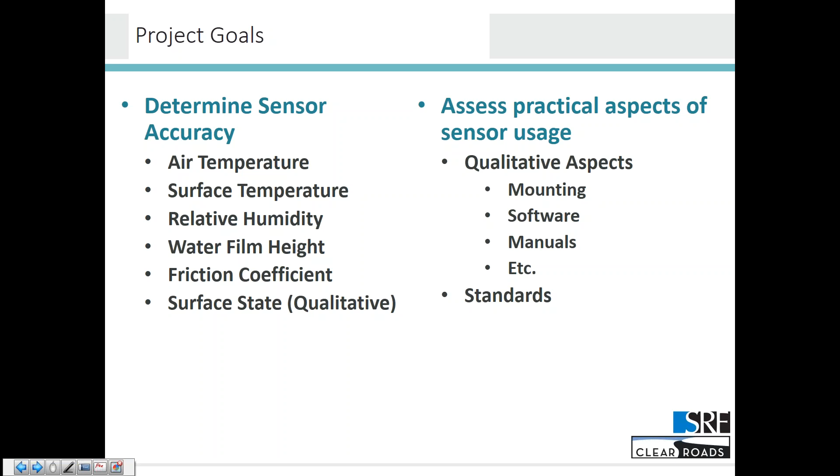The first thing that we did was try and take a look at some of the research literature out there that people have conducted over the years to talk about mobile condition sensing. The first thing we really notice is that the evaluations and research on this is fairly limited. There are only a few sensors that have been evaluated. Generally, these evaluations are lab studies, and they're not real world. You're not taking them into traffic driving on the roadway, and as a result, you see individual evaluations of how well something reports a pavement temperature, an air temperature, et cetera.

When we did find field studies, generally they were talking about friction and the relationship to braking distances and things like that. So they would take out one of these big, like Halliday friction wheel things, pull it around, and then compare that to a sensor.

But they weren't really doing overall evaluations for the quality of the data that the sensor provided. In the few side-by-side comparisons, a lot of the times they were just looking at one. It wasn't a true side-by-side, and that really made it very difficult to compare between studies. You would have a sensor being exposed to a set of conditions at a point in time, but you wouldn't have multiple sensors in the same condition at the same time. And that makes that comparison really, really difficult.

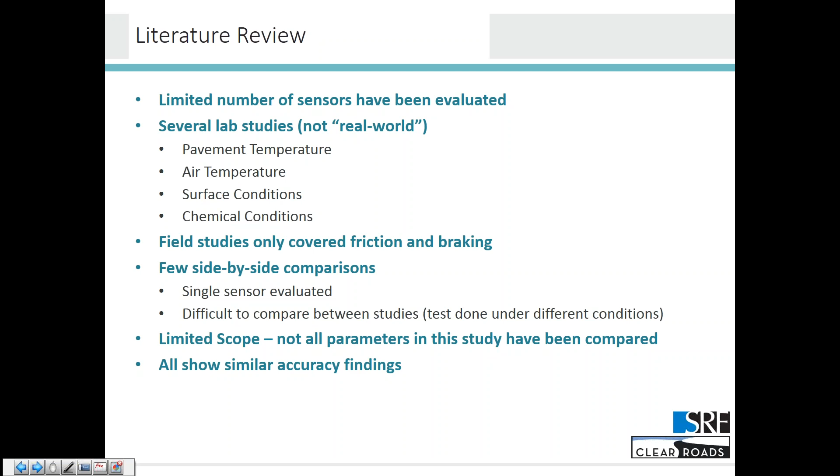And that gave us the background of what we were looking at and what we were going to have to try to accomplish. And we very quickly came to the realization that what we were doing was somewhat new. The format and scope of this project was something that hadn't really been done before. So the next thing we did was take a look at that literature review and go out to do a survey of the Clear Roads states.

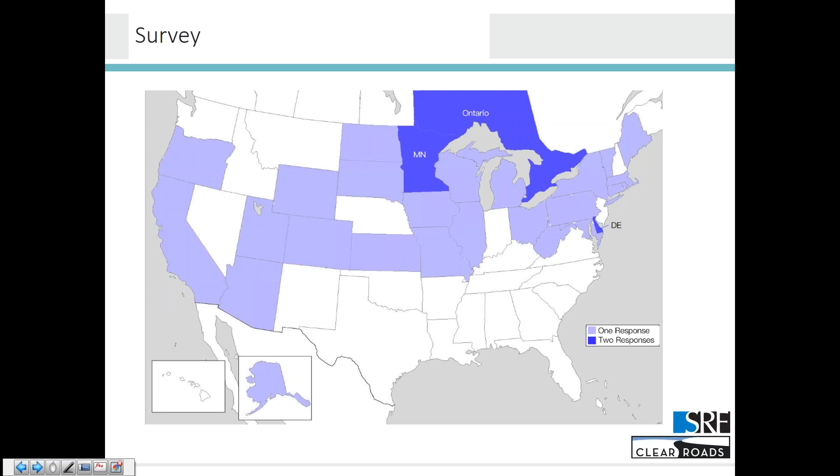Here you can see the folks that responded to the survey. Generally, there was one response per agency in the state, although from a few folks we did get two from different agencies, in particular Ontario, Canada, and Minnesota, because those folks deal with a lot of snow and were more than willing to share what they learned with us. The big results of the survey looked something like this. These were the big takeaways that we found.

First of all, there isn't a lot of mobile sensor use out there. We found 18 states that did them in one form or another, at least one vehicle equipped with at least one sensor type. But we found 19 states were planning to add these sensors. So although it isn't prevalent, it's definitely growing. And 9 of those states plan to add more than 80 sensors to their fleets in the next 3 years.

So clearly there is a trend out there to want to start collecting data in a mobile environment, and that puts studies like this in the forefront of importance because these are becoming more prevalent. You should know a little bit about how they perform. One of the things I mentioned early on as a goal is to start figuring out how people use these in a practical environment. Aside from how do they perform, what do you actually do with them?

And it was interesting. We asked folks, how do you actually attach these to a vehicle? Side mirror was really common, and I'm sure a lot of the folks listening in have seen the little, I think it's RoadWatch sensors and things like that, that sort of clamp onto the mirror of a vehicle and give you a pavement and air temperature. But interestingly enough, there were a fair number that used a trailer hitch where it either clamped onto the ball or fit into a trailer hitch receiver.

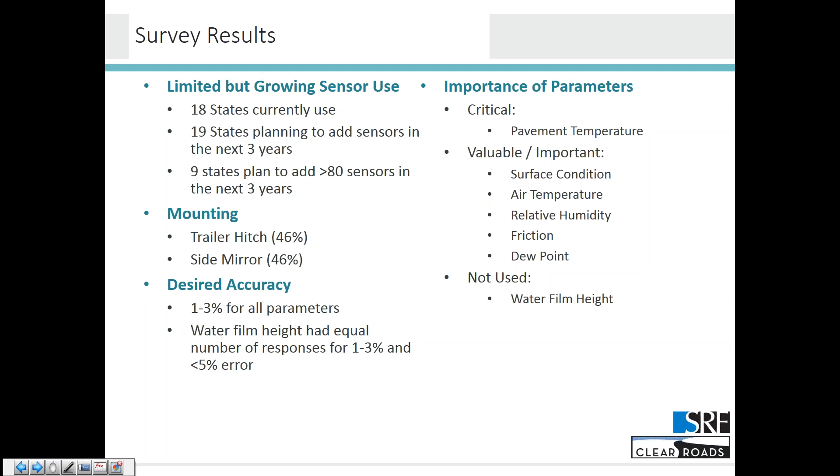So let's talk about the actual sensors. These neat little silhouettes on here are all to scale, so they give you a feel for the relative size of the devices out there. There were 4 sensors that we were able to obtain to evaluate: the Lufft MARWIS unit, the Teconer RCM 411, Vaisala's DSP 310, and the High Sierra IceSight.

All of these, except for the Teconer, have a kind of a dedicated mount. They attach to the vehicle one way or another. The Teconer was unique in that it actually provided an adapter to clamp onto the ball on a trailer hitch. So all of them are roughly the same size. All of them, as you can see for the reported parameters, are roughly the same. But how they mount varies quite a bit depending upon which one you're talking about.

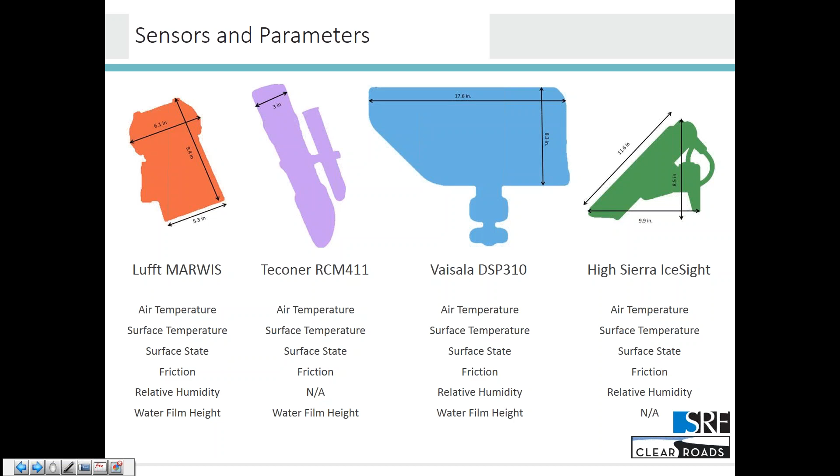In terms of the parameters they report, they were all the same, except the Teconer did not report a relative humidity, and the High Sierra IceSight did not report a water film height. So that's what we looked at. A quick note, the Vaisala was actually a 2-piece unit. There's a separate device that pointed down at the pavement, which is slightly smaller than what you see here. We did have both pieces mounted on the trailer, but these are far and away the largest chunks. And you can see that here.

The test rig is a beautiful example of our handiwork here at SRF. It looks a little bit more kind of rustic than it actually is. As you can see, there's a basic frame which we constructed and cross-braced to make sure that the sensors themselves were stable and didn't vibrate on the trailer itself. We have a large watertight enclosure for the electronics, that big equipment box you see there.

At the very front and back, you can see the 2 Vaisala units. There's one at the extreme rear pointing down and a separate unit up at the front also pointing down. And then the Lufft, Teconer and High Sierra devices in between. We did create these adjustable mounting height devices, and we just called them sleds, but they're really just a 2x4 with some holes in it. But that allowed us to install the sensors at the manufacturer's recommended height all the way around. That's what we maintained for the test. In all cases, we installed at the recommended height, and we used the default calibration for that installation.

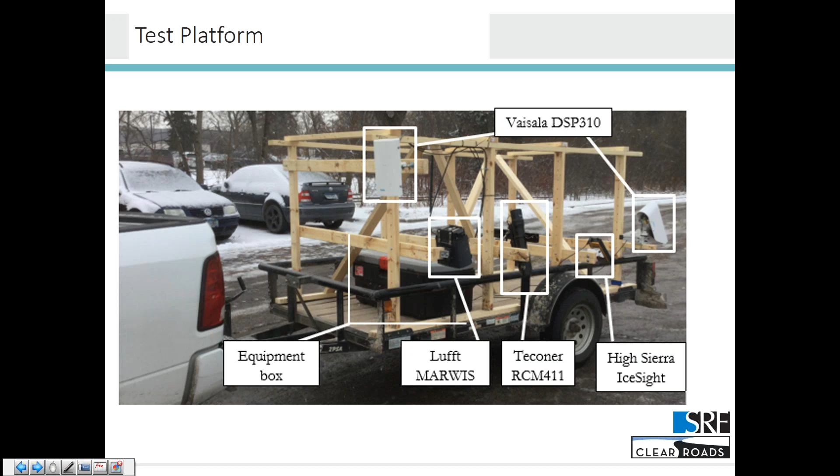And that really gets us into what the user sees. All of the sensors provided software for a user interface. You can see that the Lufft, Teconer, and Vaisala are all bits of software that ran on Android cell phones. In all cases, for those, they connected wirelessly to the device, either through a built-in Wi-Fi hotspot in the device or through a serial over Bluetooth connection. All of these bits of software on the cell phone send data up to a cloud service from which data can be retrieved later.

The outlier here is the High Sierra device. It connected wirelessly as well, but to a laptop computer, and then they provided a Java application that allowed you to see in real time what it was doing. There's also a separate little window that popped up that's not shown here that gives you just a readout of temperature and surface data as well. But this is what you use to kind of see the incoming data and perform calibration, things like that. The High Sierra also provided a physical connection if you chose to use it. I think it was just an RS-232 serial that you could use to connect out.

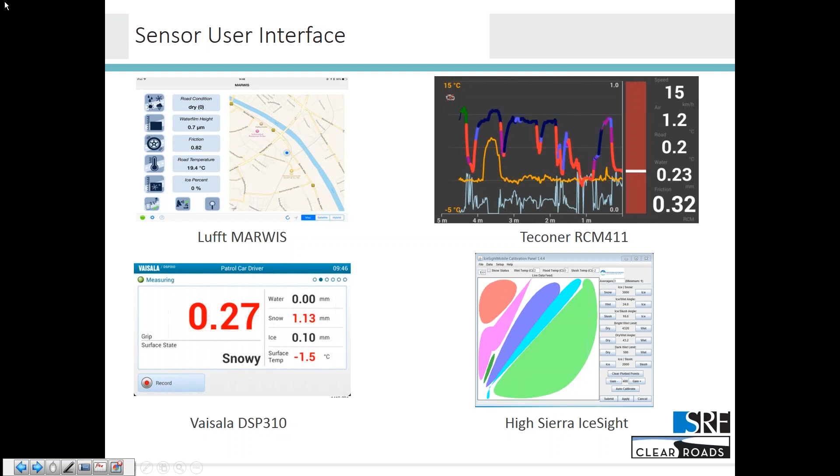So that's the background. That's what we were trying to accomplish, what we found in original research and with the survey respondents, and the devices we were able to obtain and how we actually installed them. All of that, of course, is pretty boring compared to the stuff that's coming up next. Kate is going to talk to us a little bit about how we did the testing for these, and then ultimately what we found for accuracy and interesting bits about the data.

So we were able to drive around on that and stop, get out of the vehicle, take baseline measurements and compare it to what the sensors were reading, which allowed us to hit that first goal, which is to try and determine the accuracy for each of the parameters of the test sensors. The second test was the field testing that we did. And this was in live traffic. We created a route based around our office in the Twin Cities. This is west of Minneapolis, still in the metro area.

This was taken on interstate, state, and local roads to get a variety of different conditions and different speeds. It was about 15 miles total in length and gave us a more practical assessment of what these sensors would look like when you took them out into traffic. However, because we're going through live traffic, we don't have a baseline measurement the same way that we did in that closed track because we couldn't get off in the middle of the freeway and stop and park and take some measurements. For both of these tests, we used cameras, both a front mounted dash cam and a camera pointed to the back in the wheel path, to see the conditions while we were driving and get a record to compare our data with.

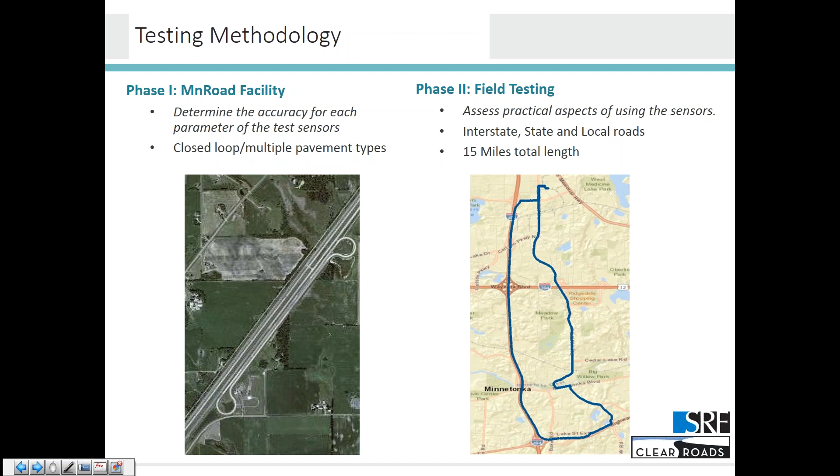So continuing on with the test methodology and those baselines that I mentioned, for the phase one testing we did a total of 6 runs on the MnROAD facility. We used 2 Omega equipment pieces shown in the bottom there for the air temperature, relative humidity, and the surface temperature, more of the meteorological data pieces. And we also used a wet comb, which was that little metal piece up there, to measure the water film height.

The phase 2 baseline was a little bit trickier because, like I said, we couldn't stop in the middle of traffic. We did 20 runs of this. We did have some baseline measurements that we took from Weather Underground, which is a crowdsourced weather site with very high accuracy, and we used that to get baseline for air temperature and relative humidity to compare it to.

Overall, we had over 90,000 data points that were collected during testing, which took place between December of 2017 and April of 2018. It was a great winter for testing and a bad winter for everything else. We had 5 winter storms and a blizzard. During the test runs, we had a range of temperature between -16 and 57 degrees Fahrenheit. We had a total of almost 63 inches of snowfall, and during that time period, we had 26 days below 0 degrees Fahrenheit. We did this testing in a variety of weather conditions to try and get a broad range of what these sensors would look like in a lot of different scenarios.

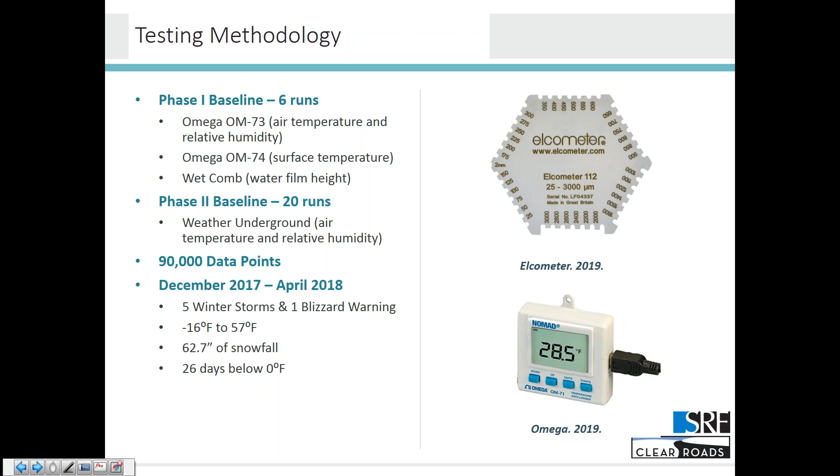So that brings us to the more interesting pieces, the results of this sensor. So starting off with some of that meteorological data, we can go with air temperature. So these slides are going to be broken up between the phase 1 and phase 2 results. The phase 1 on the MnROAD facility was about determining accuracy.

So again, if you remember back to that survey, most respondents were thinking that they wanted about a 1 to 3% error. And sometimes that was never met completely by that 1 to 3%, but keeping in mind that we are typically working with very small numbers. If you're talking about 1 to 2 degrees Fahrenheit, that percent error goes way up.

So overall, the average percent error when we were comparing it with the baseline was 3.8 to 14.6% error, with the lowest percent error being the Lufft device and the highest being the Teconer device. However, that translates to about a 1.4 to a 5.5 degree Fahrenheit difference. So overall, although it's a larger percent, the actual degrees may not be as bad as if you were just looking at that percent.

Then the phase 2, which is focused on comparing these sensors to each other. This is an example of the data that we took during phase 2. So here's a graph of one of the runs that we took. You can see that there's this beginning of this downslope where all of them are kind of sloping downward, going from like 60 degrees to about 10 degrees. And this is because we had our trucks and our vehicles stored in a garage. And as we took it out, all of the sensors needed a bit of time to adjust to the actual outdoor conditions. Typically that took less than 10 minutes.

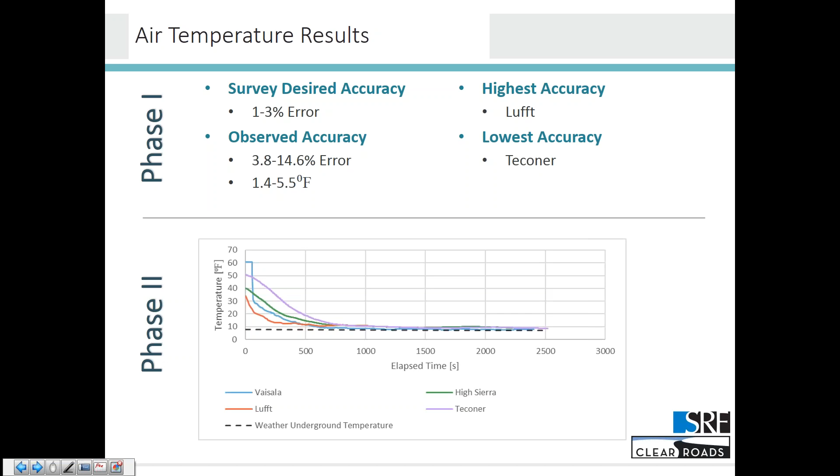So going with the surface temperature, which is, again, another meteorological result, we had similar things to what we found in the air temperature. Again, that desired accuracy was in that 1 to 3% error range, and again, our observed error was much higher than that. Though it only really translates to 2 to 3.8 degrees Fahrenheit difference in error, which is actually, I think, pretty good. The highest accuracy was the Lufft device, which was hitting that average of 2 degrees Fahrenheit error.

However, when we were testing on the MnROAD facility, which had a variety of pavement, Vaisala did perform with better accuracy on the aggregate and asphalt pavements. The lowest accuracy for this ended up being the High Sierra, with the exception of the Teconer on the asphalt.

And you can see too from that phase 2 testing in the real world conditions below, there's a little bit more of a difference in this example, but you can see that where there are hills and valleys in this graph, the sensors generally agree with each other. They might be a few seconds off just based on the placement of the sensors on the trailer, but for the most part, they are in agreement even if the magnitude is slightly different. It also has a little bit of an adjustment period as we're coming out of the garage. You've got that higher temperature that then drops down to much more what you would expect.

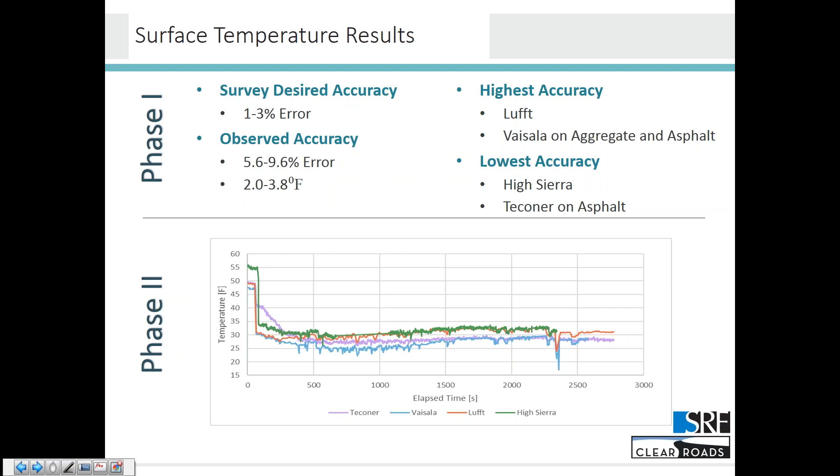So the last meteorological result was the relative humidity. As Mark mentioned up front, Teconer for this study did not have a relative humidity sensor. It was available in an extra package, but it was not made available to us during the testing period, so we were not able to attain it, but you can add it onto the device for an additional price. Again, desired accuracy is still 1 to 3%.

We see a much higher testing percent error in that 9.2 to 15.5% error, with Lufft being the lowest percent error and Vaisala being the highest percent error. And bringing it back to the units, that's a 6.5 to 8.4% relative humidity, not percent error again.

And then again, like the other two meteorological pieces of data, we have an adjustment period before they all kind of even out towards that baseline that we had gotten from the Weather Underground humidity. This again took about 10 minutes to even out, but this is pretty typical from one of our test runs where they all kind of make their way up to the baseline, and while they might have some differences, they're generally in agreement with one another.

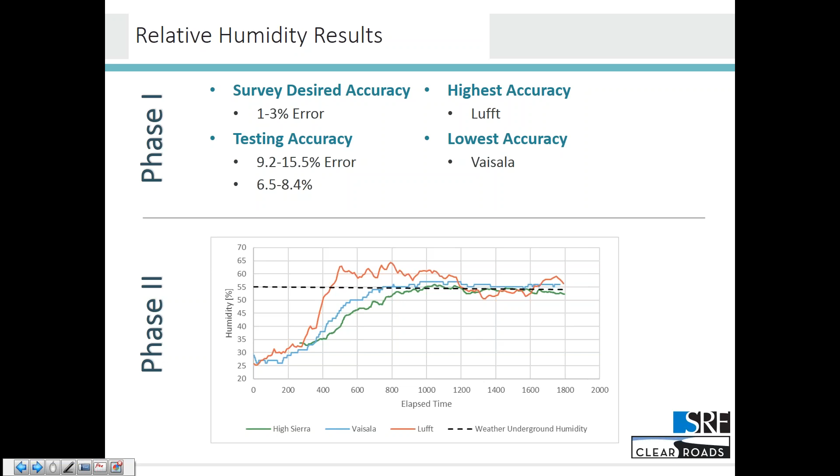So now we get into the results that are a little bit trickier to quantify, starting with the water film height results. As I mentioned in the testing methodology, we used a wet film comb to take this baseline. However, at the MnROAD facility, we were having difficulties using it as we're taking a wet comb on very porous conditions. So all of the water would be too deep within the pore, and you're trying to take the wet comb over a flat surface, it's not going to get any readings.

So we had to change the methodology a little bit from what we had anticipated, and we ended up taking a piece of plexiglass back to the garage, spraying water on it, using the wet comb to see what that water film height was at, and then comparing it to the sensor data. The IceSight machine did not measure the water film height, but the rest of them did.

And this was the value that we saw had the least amount of agencies using and had the more acceptable higher error, that around 5% error. Of course, because we're working with very small numbers, that error is quite high. We're looking at 60 to 373% error, which obviously seems quite alarming when you're looking at it. But considering that average error is 0.12 millimeters to 0.2 millimeters, taking it back to that small numbers does make a lot more sense. Vaisala had the smallest percent error, whereas Teconer had the highest error.

Looking at the graph, you can see much more of a difference in magnitude than we saw with the meteorological data, which makes sense because we're using lasers to try and determine how high water is, which is a pretty difficult task. However, you can see that, like the other sensors, it still has those sort of agreements in those dips and valleys, even though the magnitude is quite different.

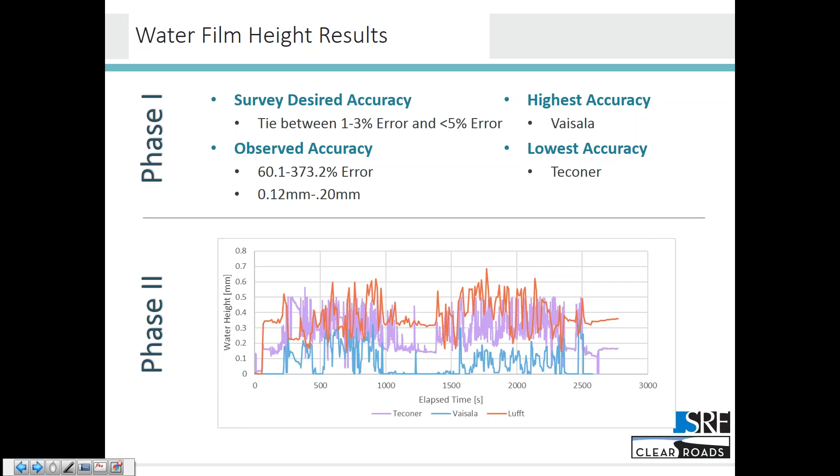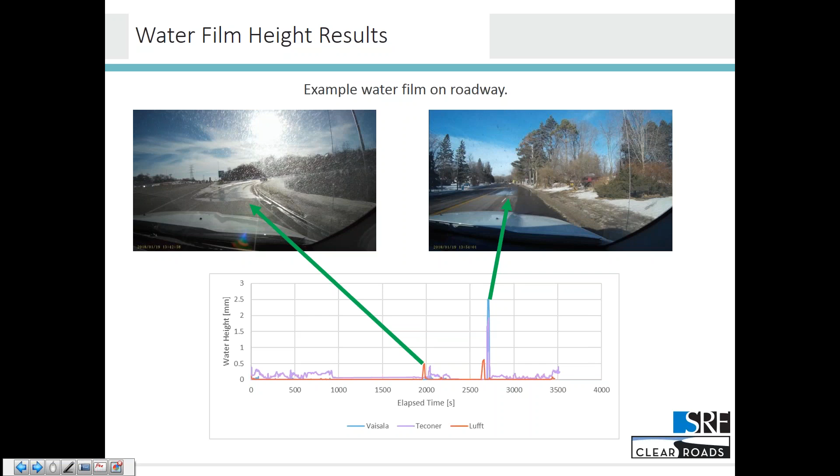So another more difficult option to try and quantify was surface state. And this is very difficult just because descriptions of the surface state are going to be subjective. Wet, dry, damp, ice, snow, these all mean different things to different observers, especially when you're talking about, for example, the difference between damp and wet and damp and dry. The amount of water on a roadway that carries it over one threshold is something that's going to be varied from person to person and agency to agency.

So we monitored these states by video runs, and when we were at the MnROAD facility, we would go out and make a physical assessment with touching the pavement, getting a good look at it. However, it's still going to be a personal decision. So our staff assigned a condition to each of these testing facilities and classified it periodically when we were on the MnROAD facility, and then compared that to the observed state from the sensors and the reported state. So obviously it's not going to be as concrete in terms of accuracy, but we were still able to find some interesting results.

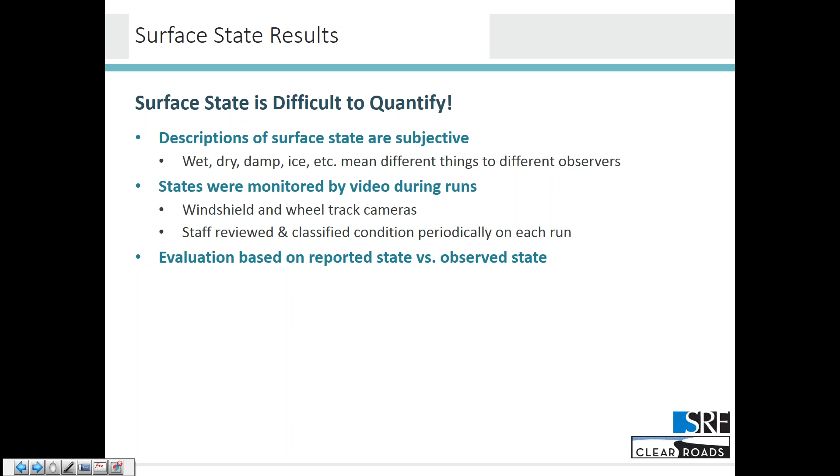The Vaisala and the IceSight allow you to go in and manually adjust the amount of water that it'll classify roadways as damp versus wet and damp versus dry. So if you choose to, you can go in and manually change that. And Teconer and Lufft can't adjust directly, but there are ways that you can make them more or less sensitive, especially if you choose to recalibrate it from the factory sensors.

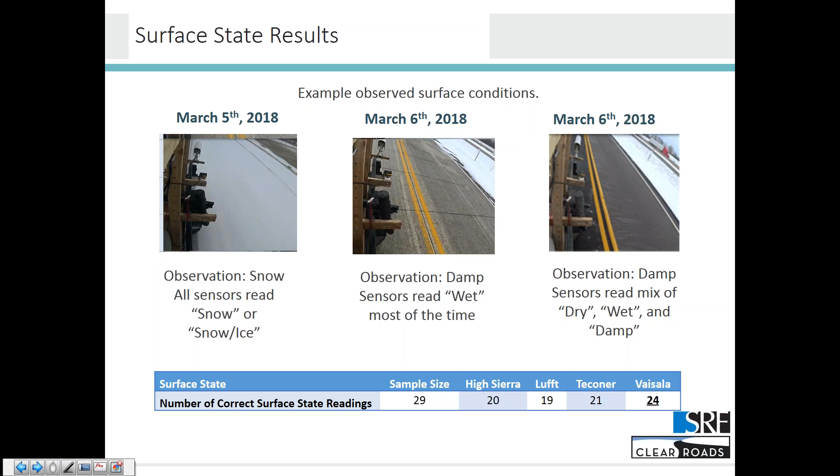So the last parameter that we ended up measuring, and probably the most difficult to quantify, was friction. Unfortunately for this testing, we did not have a baseline. There is not a good way to take friction measurements without some form of intrusive friction reading, and we were not able to obtain that for this reading. So all in all, it ended up being based on comparing the phase 2 results to one another and seeing kind of how sensors looked across overall.

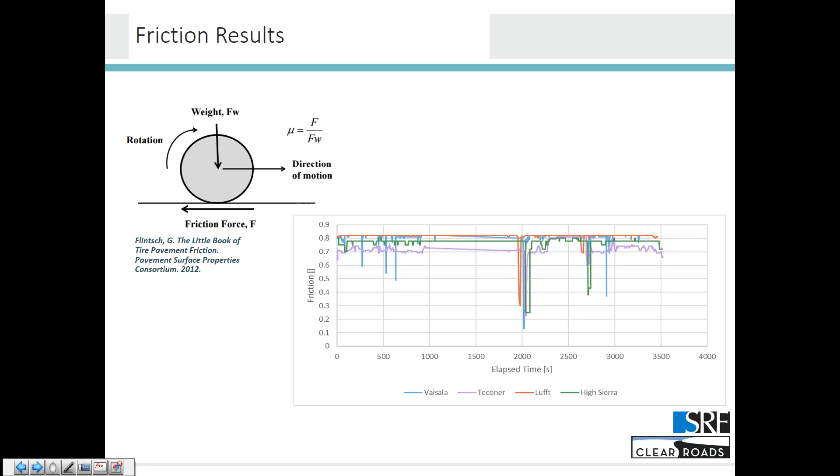So summarizing these results from the phase 1 pieces, we found that typically sensors performed similarly even if the percent error looked very drastic. Air temperature, we only had a difference of about 4 degrees total from the highest average error to the lowest average error, and surface temperature was even closer with less than a 2-degree difference. Relative humidity, again, only about 2% difference, and water film height, again, only about 0.08 millimeters difference, which is quite small.

Surface state was a little bit more drastic, but again, we have a little bit harder time quantifying that as it's more subjective, a range of 5 out of 29 results incorrect to 10 out of 29 results incorrect. Like we said earlier, friction is not able to compare to a baseline for this project, so we don't know exactly where we line up, though we did find that results generally were similar across the board.

I'm going to hand this back to Mark, who's going to get a little bit more into the conclusions of this study and this project and give us a little bit more depth. Thanks, Kate. And I see we have a few questions coming in on the bottom that we will get to later on. I'm sure there'll be some good discussion there.

So with all that testing, what does it mean? What we had hoped was that in one way or another, we would be able to come out with an overall rank of the sensors. Brand X is best, brand Y is least good, and you can make your decisions accordingly. What we saw and what Kate just described, the data doesn't really support that sort of an overall conclusion. What we did see is that different manufacturers perform better or worse on different parameters that they're trying to measure.

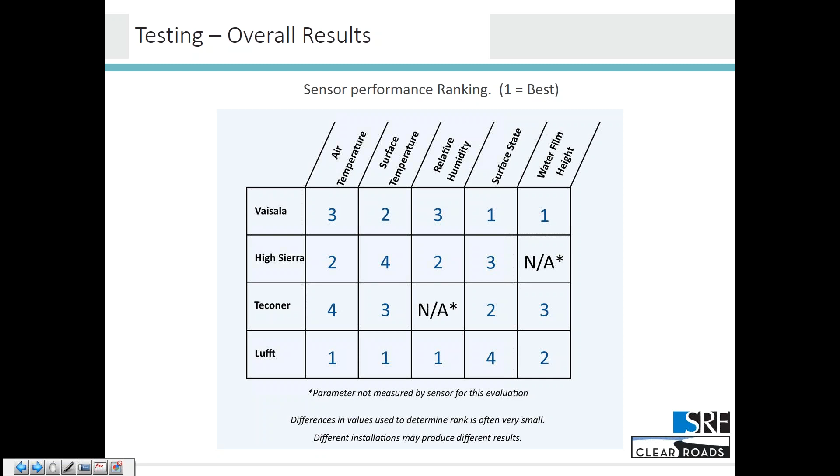So the next big goal was talking about developing standards for how some of these things, whoops, my mouse is doing strange things here. There we go. Developing standards for how you describe these conditions. And as soon as we began looking at the documentation from the manufacturer, we noticed a few things. Number one, as Kate mentioned earlier, there's a lack of well-defined terminology. Where does icy begin and slushy, and where does snow begin and ice, and what is damp versus wet, all of those sorts of things.

Those aren't well-defined terms. We also find that when we look at the schemes that have been developed by various agencies out there, everybody's got a little bit different take on how to describe these things and what the underlying measurements to support those descriptions look like. And we found that made it very difficult to translate data, in other words, the numbers that these devices generate, to use that to describe what the road condition is.

And so our goal here was to define a limited set of surface states so that a word meant something. Then to try and define the relationship between a parameter like friction and that state. And then lastly, moving on from this, the ultimate goal would be for Clear Roads to present some recommendations to manufacturers and say that for a given condition, it should look like this and it should report a friction like this. And that ultimately would allow for better data portability between different sensors, and also to be able to compare from agency to agency.

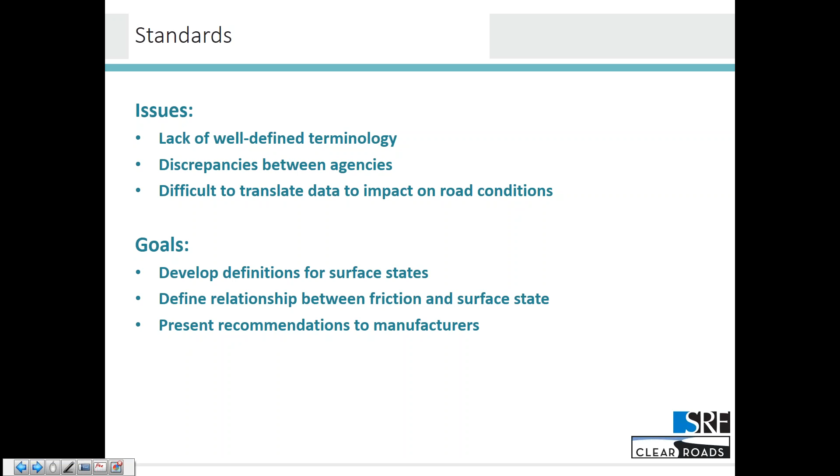In terms of defining what those are, ice means that you've got frozen water, in other words, ice, on the roadway surface with 0.5 millimeter or greater thickness. Your friction coefficient that would correspond to that would be something about 0.2 or less. And that means for the public, those are poor driving conditions. When you move to snow, you'd have at least 5 millimeters of accumulated and unplowed snow on the roadway, so it's actually coated and obscuring the surface. Corresponding frictions would be from the top level of ice, something around 0.2 to about a 0.6, which corresponds to what we observed when we were actually out taking the trailer through the real world roadway tests. Again, these represent poor road driving conditions.

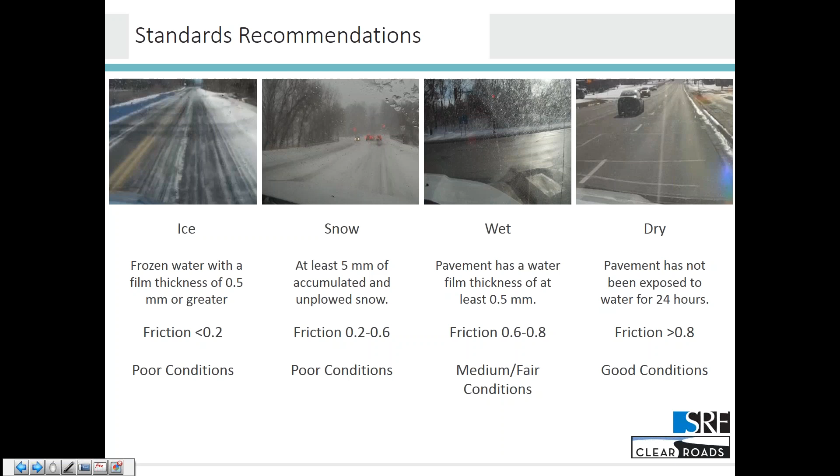So we think that this simplified taxonomy makes sense both in terms of trying to match some piece of measured data to the description and in terms of describing that roadway to people. We're coming down to it. So the overall conclusions, the takeaways from what we saw in the testing. As we mentioned, this is something a little unique. There are very few side-by-side comparisons of these sensors out there.

Getting a more comprehensive handle on relative performance is important because we're seeing sensor use is increasing. There aren't a lot of states with a lot of sensors right now, but the number of states using them is increasing, and the number of sensors deployed by each appears to be increasing too. When we asked, most agencies were looking for a percent error of somewhere between 1% and 3%. No sensors were found to meet this, but at the same time, we don't know what the rationale is for that 1 to 3% either. It may have just been a standard reaction to how accurate you want any piece of data. There could be something deeper there, but we don't know where that number comes from and whether or not that actually has to be met for data to be useful.

The big takeaway, again, from the testing is all the sensors perform in a similar fashion for air, surface and humidity. When you get into more variable accuracies is when you get into things where you're not touching it directly to measure it. So things like friction, water film height, and surface condition, you're all basically trying to judge what they are by looking at the pavement. And that, I think, is going to limit the accuracy of these over time, just because of the nature of what you're trying to do. Again, in no case did we find a best sensor that was just the best at everything. Different sensors were better or worse in different parameters, but they all performed similarly across all the categories.